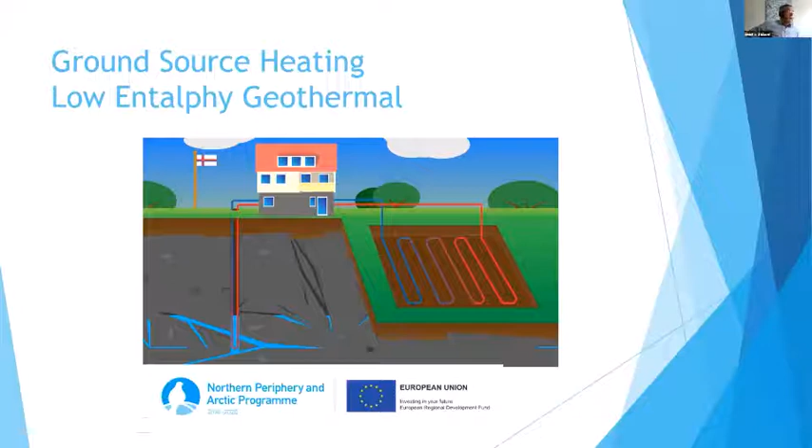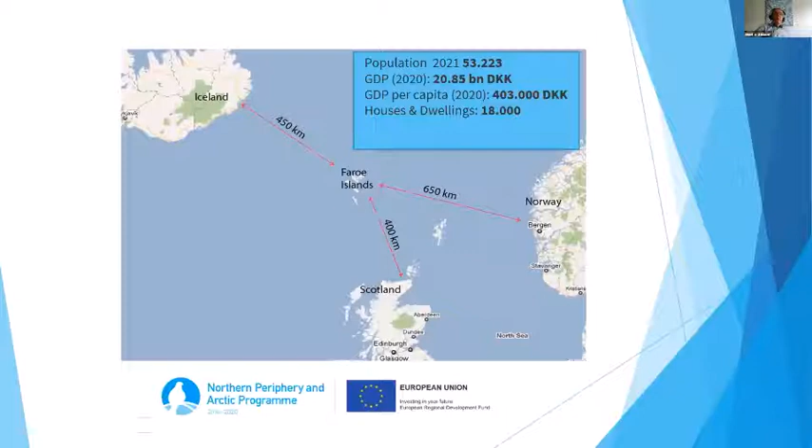And for those of you who don't know anything about the Faroe Islands, I have set up a small map. You can see we are lying here in the middle of the Atlantic Ocean between Iceland, Scotland, and Norway. And we are a total population of 53,000 people. Our GDP is relatively high. It's 20.8 billion Danish kroner, and that gives a GDP per capita of 400,000. And we have about 18,000 houses or dwellings in total in the Faroes.

The next figure is showing the energy flow of the islands. And as you can see, we are, as many other island communities, very, very dependent on oil. The first bars are the oil which is used by our fishing and merchant vessels, and it is nearly 40% of the total energy. And the more light red is oil which is used onshore, and we use it for transport, for industry, for heating, and for power production.

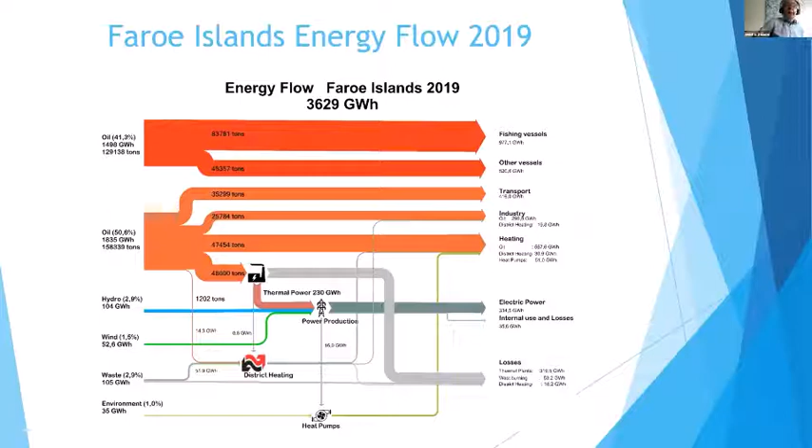And at the bottom you can see what we have of so-called renewable energy sources. That is hydropower, wind power, and waste burning. And they are very small compared to what we use of oil. That gives us a big problem because our CO2 emission is very high, and it is growing, and it has been growing all the years since 1990. So our challenge is how we can lower these CO2 emissions.

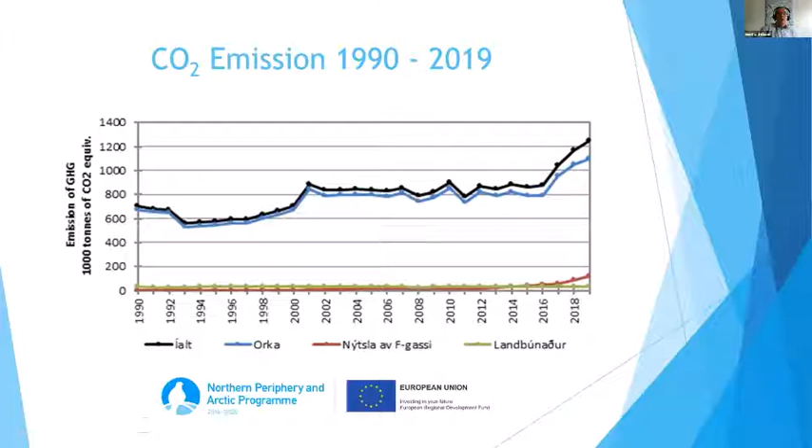And as I said earlier, we use a lot of oil for power production and for heating, and our aim is therefore to reduce the demand and shift over from fossil fuels to renewable fuels. And you can say we are to pick the lowest hanging fruit, and that is to look at if it's possible to replace the oil which is used for space heating in houses, and replace it with electricity in combination with heat pumps. And that's what my presentation will be about.

And we can say that 10 years ago we started an initiative where we would investigate if it was possible for rock heating to replace heating with oil burners.

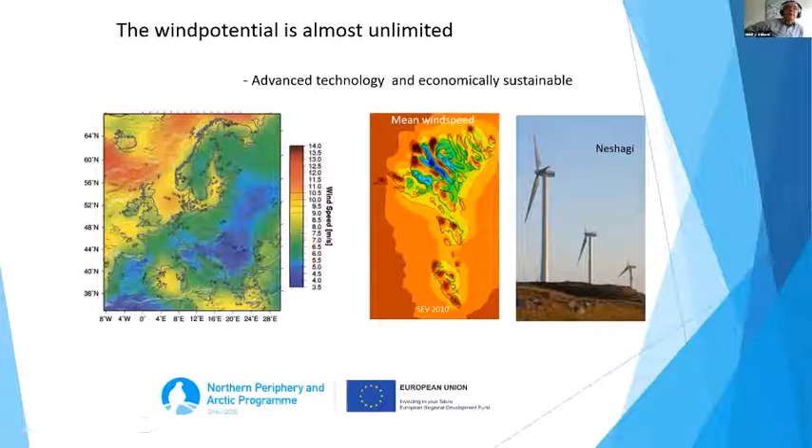On the next slide, you can see a map of the wind potential or the wind resources in Northern Europe. And you can see that we, on the Faroes, are in the red area. We have very, very good wind resources. The average wind speed is over 10 meters per second, and that is more than you have offshore in the North Sea, for example. And that's the reason why we think that wind power is a good alternative for us.

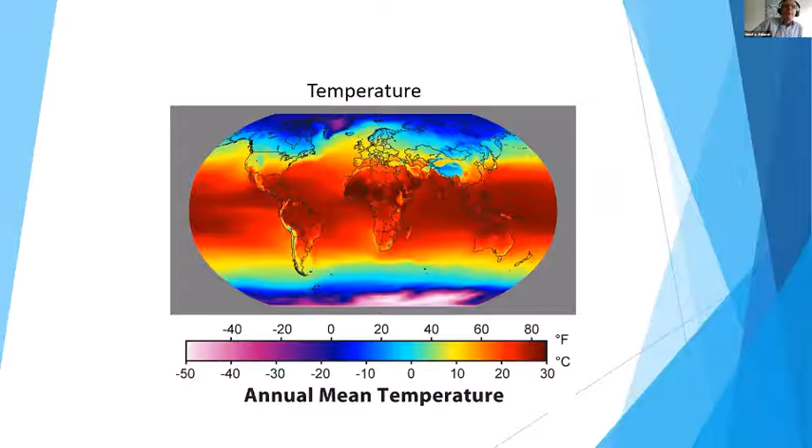Another important issue is that if you look at the globe and try to find out what is the mean temperature, you can see that the red area goes up in the north towards the area west of Scotland and south of Iceland, and that's because of the Gulf Stream. So you can see that we are living in an area where it's relatively warm compared to where we are placed on the northern hemisphere.

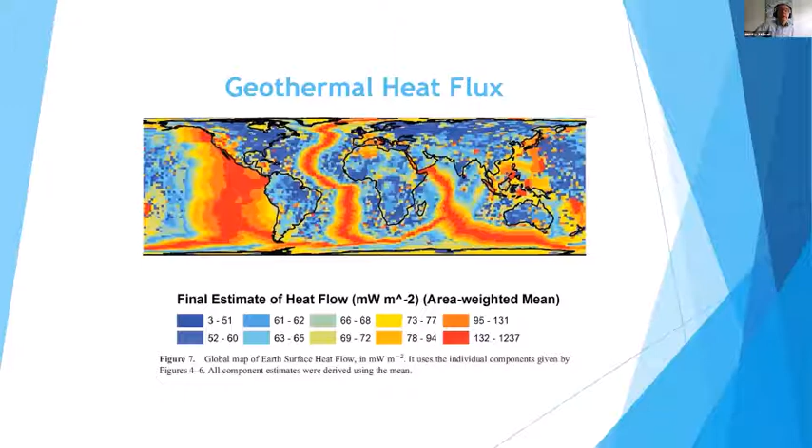And those things I have explained earlier mean that we have a ground temperature in the Faroe Islands of maybe from 8 to 12 degrees Celsius, and that is very high compared to what we have in other countries. For example, in Denmark, they have a temperature which is much lower than ours.

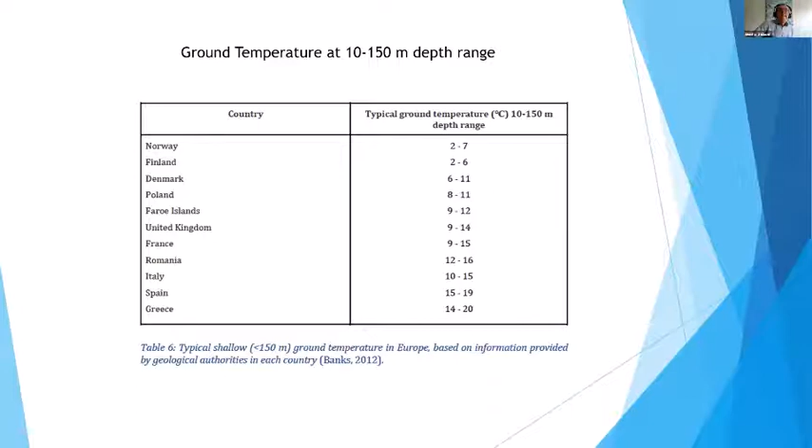So you can see that in all we have a very stable temperature. It's not very often that we come down to zero. On the other hand, we seldom come up over 10 degrees in the summer times.

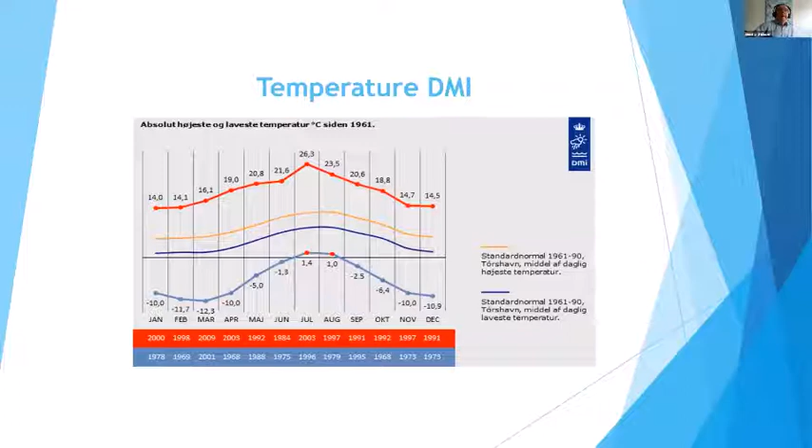This figure is measurements from a scientific drilling which was carried out on the island of Suðuroy, which is the southernmost island, and they managed to drill down to 3,000 meters and hit a temperature of 100 degrees Celsius. And I can also tell you that we have had oil exploration on the Faroe Islands from 2000 to 2014, where we drilled 8 wells, and we came down to a similar depth, 4,000 meters, and there we hit a temperature of about 100 degrees.

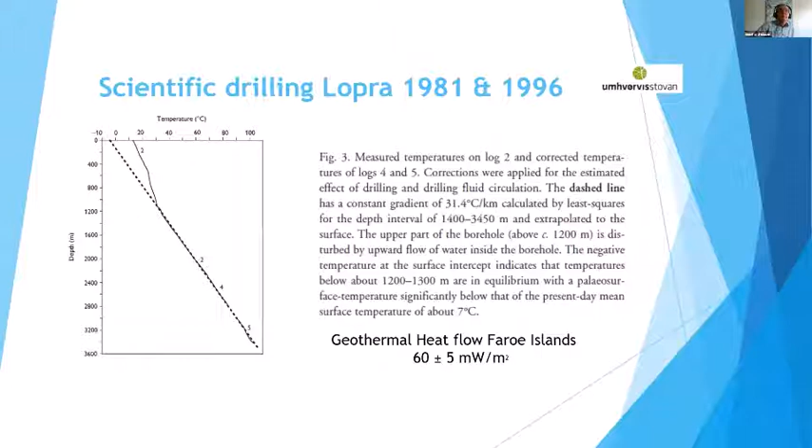And to come again to the point of what it is all about, we started a project 10 years ago where we tried to find out if geothermal heating could be applied on the Faroe Islands. In this case, we hired some expertise from Sweden, and they came up here with equipment, carried out a test drilling, performed a so-called thermal response test, and made some simulations of what it would be like to have a geothermal heat pump on our islands.

And the reason why we contacted people from Sweden is that Sweden, together with, for example, Switzerland, has been a pioneer in the development and commercialization of this type of heat pump. And they have done it for more than 30 or 40 years. And you can say that the geological conditions in Sweden are in some way similar to ours. The only difference is that they have granite in their underground, where we have basalt.

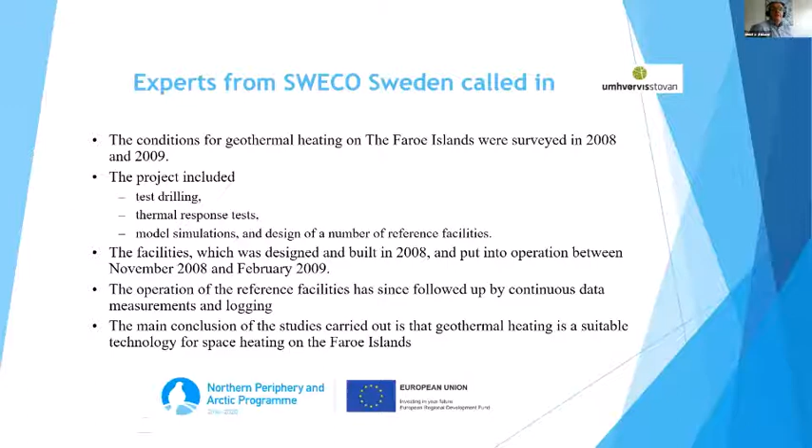And to go into more detail in the project, we wanted to find out, as I said earlier, if a ground source heat pump is a suitable technology. In this case, you must have in mind that, based on the temperature I told you about earlier, the houses and dwellings in the Faroe Islands need heating all year round. It's not the same as, for example, in Denmark, where you can shut off your heating systems in the summer months from May to August. And the question is, what effect will these conditions have on the borehole and on the temperature in the borehole?

Another important issue was to find out the geological characteristic for basalt. What temperature do we have, and what is the thermal conductivity in the basalt? And how should we dimension a heat pump? And it ended up with some recommendations, and there

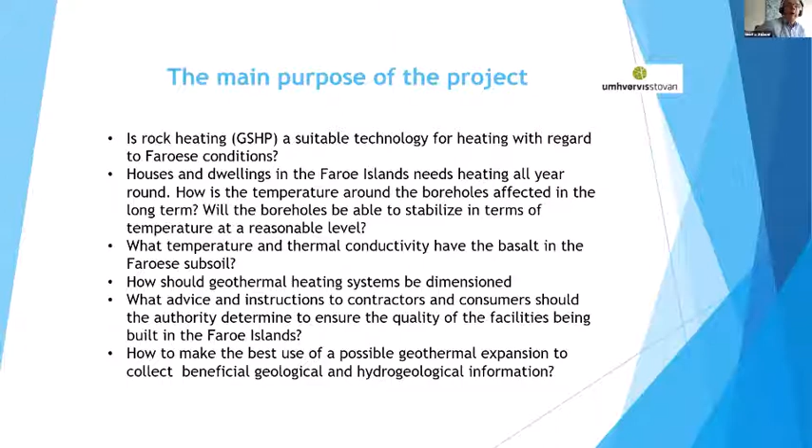you can see them. We found out that the thermal conductivity of basalt is about 1.8 watt per meter per degree Kelvin, which is slightly lower than, for example, granite, which we have in Sweden and in the southern part of Europe. But the basalt could be very different and not so uniform. So we have a lot of pores and rifts in the basalts, and that means that we have a lot of water in the pore space and the rifts.

And they also found out the other parameters. They measured the geothermal heat flux, which I mentioned earlier, and also the borehole resistance. And based on these conditions, they came up with recommendations that if you have a borehole on the Faroes, you can extract energy at 115 kilowatt hours per meter per year, and the maximum amount of energy is 25 watt per meter. And they also found out that drilling in basalt is very easy and uncomplicated. And until now, we have managed to drill boreholes down to 400 meters.

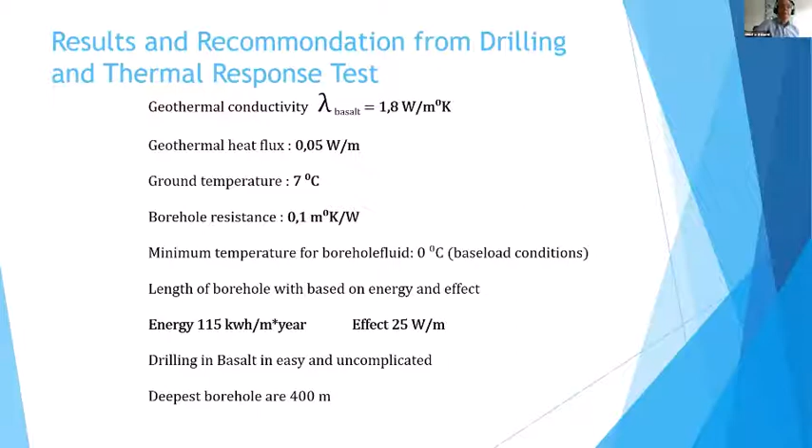And if we use those recommendations for a normal family house, which I show you on this calculation, let us say that we have a house of 150 square meters, and they use floor heating, and they have well insulated outside walls, roof and ground floor, and we have calculated that the amount of energy is 22,000 kilowatt hours per year, and the maximum effect is 5 kilowatt. That means on a cold winter day when many people take a shower, for example.

And if you have a heat pump with a seasonal performance factor of 3.5, then you can calculate that the length of the borehole is 137 meters if you look at the energy requirements, and if you take the effect requirements, it is 143 meters. And then to be on the safe side, we add 10 to 15% and ended up with our recommendation of 170 meters.

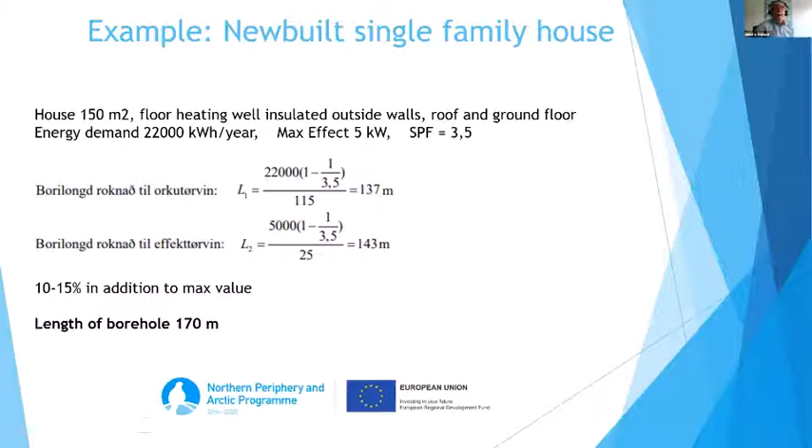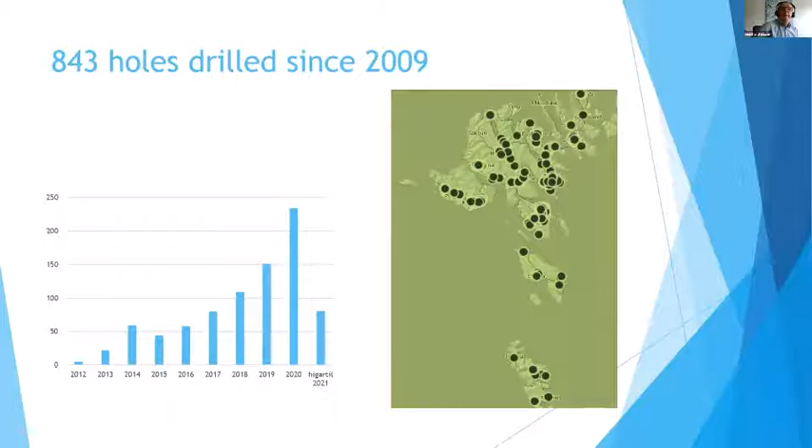Yes. And what have we obtained since we started this initiative? Until now, we have drilled 843 holes since 2009, and they are drilled all around the islands. You can see the black dots on the map. And today we have 2 drilling contractors, 2 drilling companies, and they are operating 3 drilling rigs, and they are active every day. And we have 5 companies who are selling, installing, and servicing ground source heat pumps. And in 2020, last year, they installed 220 new ground source heat pumps.

And the government has done other things also. If you invest in a heat pump, you can have the VAT refunded, and you also pay a lower price of power from the power company. And all holes are registered in a public database, which you can find if you go to www.kortal.fo.

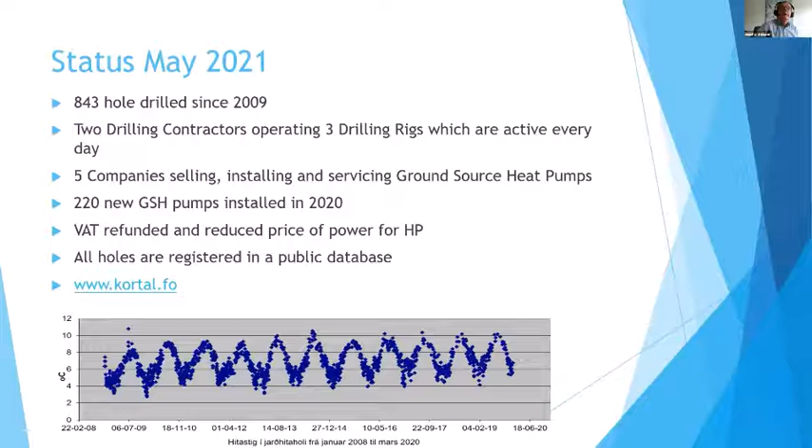And as I told you earlier, we set up a logging program, and the figure in the bottom of the slide shows the temperature in the hole from 2008 until 2020. And you can see that it is very stable. It's high in the summertime and low in the winter, and it is heated up again the next year. So you can see that the amount of energy which is extracted from the hole is not so high that the hole is cooled down.

On this slide, this is part of the capital of Tórshavn, and this is from the database which I mentioned earlier, and you can see all the holes that are drilled in this area. And to do that, you go into it on the web, and you can click on the so-called green energy, grøn orka.

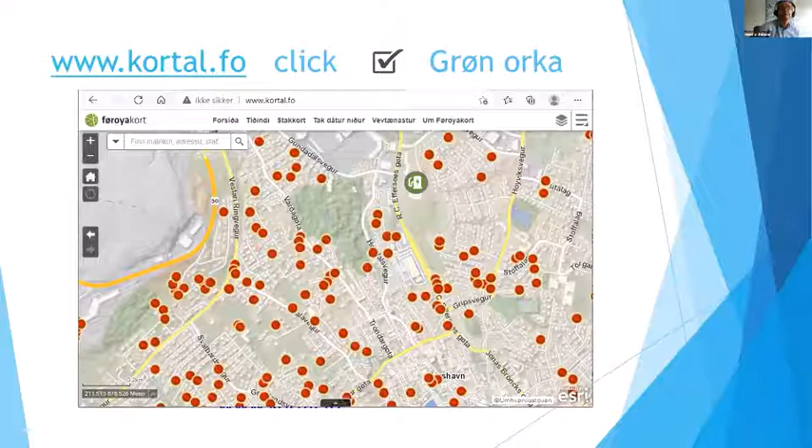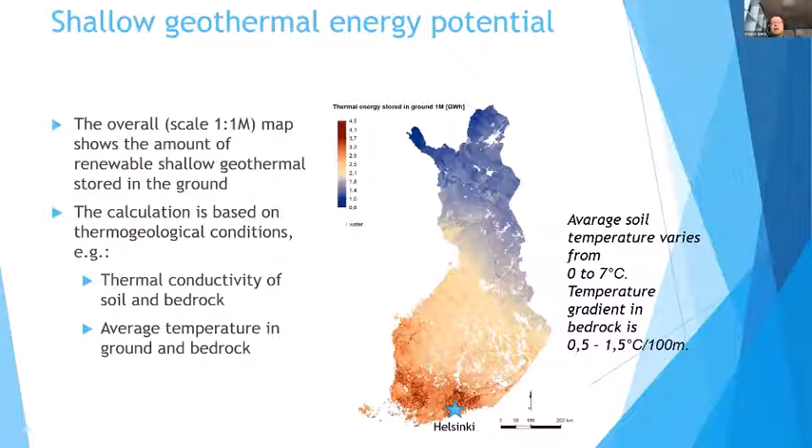And that's a challenge for these designers who try to design a proper shallow geothermal system. So we have made this overall map in this picture that shows the potential, but also pinpoints the most challenging areas in Finland. And our capital Helsinki is located in the south here, where the best conditions for shallow geothermal are also found. And about 30% of us Finns live around Helsinki, our capital. So the potential users for geothermal energy are also there. And I will use Helsinki as a case example in my presentation.

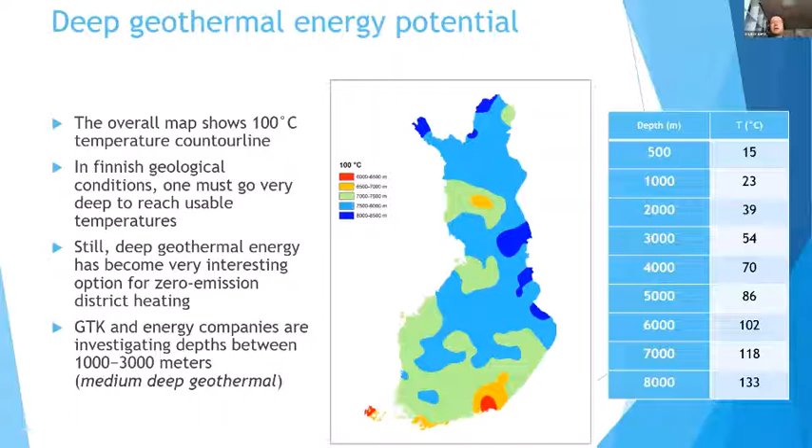And because we are a geological survey, we have also estimated the potential of the geothermal energy. The temperature levels are not so high compared to Iceland, for example, or the Faroe Islands, but we do like to drill deep. So these 1 to 3 kilometer deep boreholes, or medium deep boreholes, like we like to call them, have raised some interest. Especially energy companies are very interested to drill 1 to 3 kilometer deep boreholes nowadays, because you don't need a massive rig for that, and the drilling costs are smaller compared to actual deep drilling. But my colleague Annu will show you a case example later about this medium deep geothermal.

Of course, the Finnish government has some goals about carbon emissions, and we Finns have decided to be carbon neutral by 2035. And the Finnish government has also decided to quit using coal by 2029. And currently, more than half of Helsinki's district heating is produced by burning coal. But coal has already, of course, been replaced by biomass in many cases, but burning in general is not a sustainable solution for the future. And Helsinki also has been seeking alternatives for burning.

And geothermal energy could at least be one of them, one of the solutions. And so they have set a target in the future to raise the geothermal share up to 15%. That's a target, but at least they have set it.

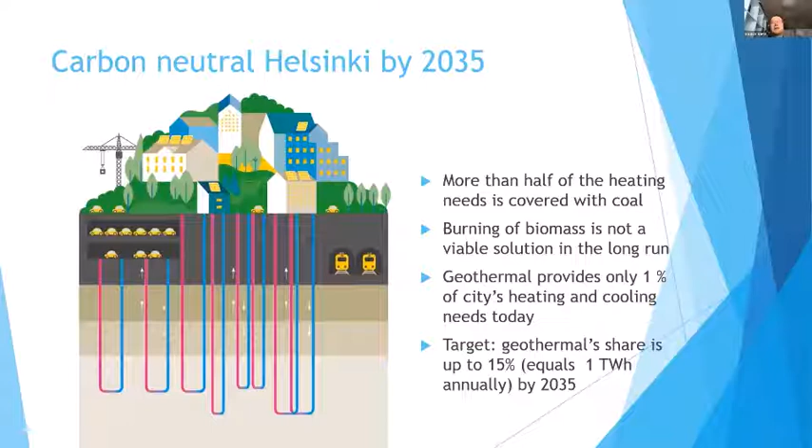So I already showed you the overall map of Finland, but we have also been estimating the geothermal potential for cities like Helsinki, you see here. In one large study, the whole city area was divided into 1 hectare squares with 25 boreholes inside them.

The heat demand of Helsinki is about 6.6 terawatt hours annually, and we have estimated that the shallow geothermal is so large that in theory, at least, it could cover the heating needs of the whole Helsinki for decades to come. But of course, that would require the whole land area of Helsinki to be drilled full of boreholes. And in this right side picture, you can see an example of a borehole matrix on the city map. The boreholes are 300 meters deep.

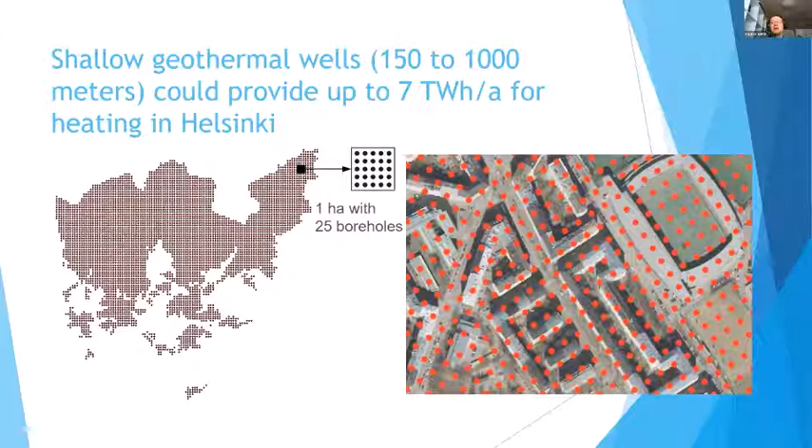And like we all know, in urban areas there are always limitations for drilling. There are underground spaces, tunnels, cables, piping, etc. But nowadays it is possible to drill even 1 kilometer deep boreholes using normal drilling equipment, and therefore partly avoid those limitations. So fewer but deeper boreholes can still provide enough energy for heating purposes.

And based on our report we did for Helsinki, the Helsinki City Planning Division made this online map, Energy and Climate Atlas for Helsinki. So in this atlas, you can compare heating energy needs for buildings and also see the energy estimations concerning shallow boreholes. And shallow means up to 1 kilometer deep boreholes.

And this atlas is one tool for decision making, whether you're renovating an energy system or planning a whole new building, for example. But of course, it's not a precise designing tool, but at least it gives you a rough estimate of shallow geothermal potential. So you can pick a plot and see what's the potential right there.

And like I mentioned, we like to drill deep. There's one ongoing deep geothermal project in Finland near Helsinki. ST1 is an energy company who mainly focus on oil products, but they have been finding new ways also. This project started back in 2014, and with these 2 deep wells extending up to 6.4 kilometers, it's the world's deepest industrial geothermal energy project right now.

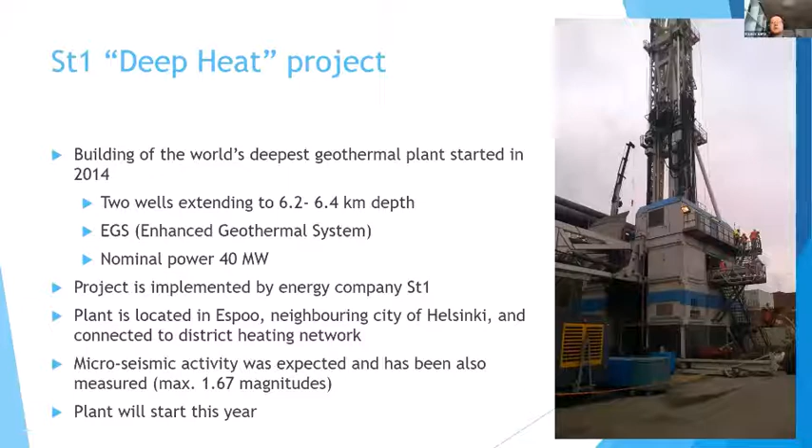And this project has a network of geophones around the drilling site, and they were monitoring seismic activity during drilling and also during the stimulation phase. Some microseismic activity was expected, of course, and also measured. This was 1.67 in magnitude, and it caused some noise and mild vibration on the ground. This deep heat project has had some delays, but hopefully it will start operating later this year.

My last slide is here. Even though this deep heat project is still under construction, our survey has been asked to do some deep geothermal exploration also in the Helsinki area. And we carried out studies near the city center last year with the district heating operator, Helen Limited. And we used the reflection seismology method for this study.

So now the most promising locations for utilizing deep geothermal energy have been mapped. And this energy company, Helen, will start test drilling on one site later this year. And this drilling project is also partly funded by our Ministry of Economics. And I personally hope that part of the upcoming EU recovery funding would be used also for other geothermal pilots in other Finnish cities, but let's see what happens.

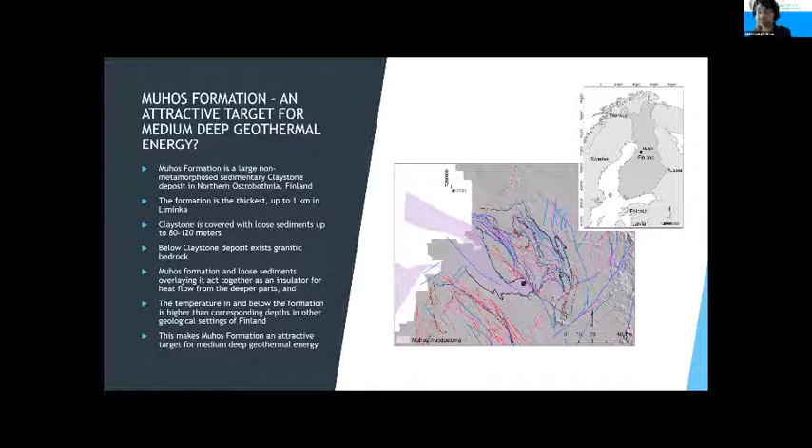As this claystone has low thermal conductivity, it produces the higher geothermal gradient, and therefore the temperature beneath the claystone formation at the interface of granite is higher than it would otherwise be in the corresponding depths. So in the Finnish scale, it is actually the temperature level that makes this Muhos formation an attractive target for medium deep geothermal energy.

The red line in the picture here, I have a different screen, shows the measured temperature as a function of depth from an almost 1 kilometer deep drill core, which is located in Liminka at the Muhos formation, and the drill core is completely covered with claystone. The average measured thermal conductivity is 1.86 watts per meter Kelvin, and the geothermal gradient is as much as 2.6 Celsius degrees per 100 meters, which is high in Finnish circumstances.

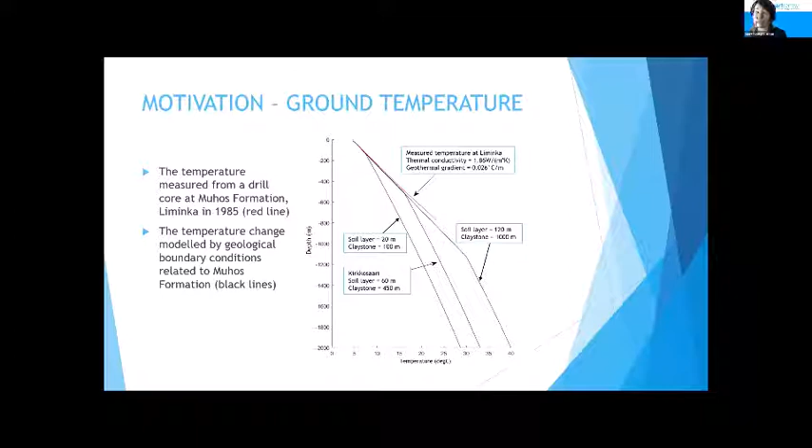And the black line in the middle represents the situation in Kirkkosaari, in which the municipality of Muhos is interested in utilizing geothermal energy, as there is no existing district heating network. The main focus of the project was to evaluate the thermal energy yield from a single 1 and 2 kilometer deep borehole, take into account the geological circumstances, and compare the results with conventional systems by estimating how many shallow 300 meter deep boreholes would be replaced by one medium deep borehole.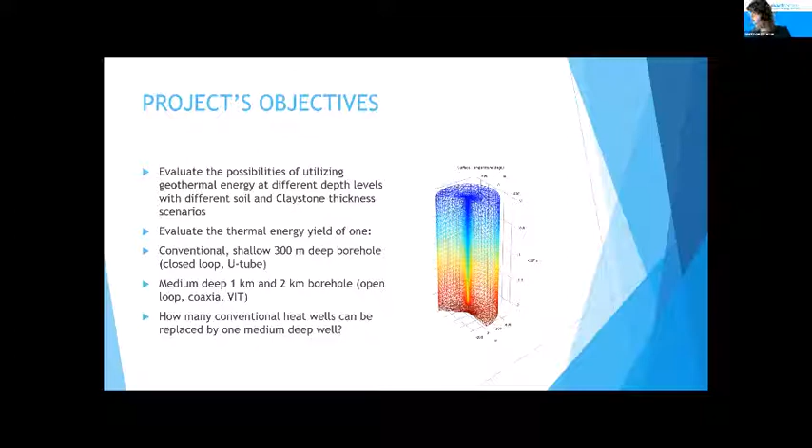And a few words about the numerical modeling. We used COMSOL Multiphysics to simulate the conductive heat transfer over 25 years into the future. The heat extraction was assumed to be constant throughout the 25 years, to get annually the maximal amount of energy from the ground using a coaxial BHE. And we assumed not to drop the borehole wall temperature below 0 Celsius degrees. And also we used the maximum volumetric flow rate with acceptable

pressure losses. And we modeled the open loop coaxial BHEs as a two-dimensional axisymmetric model. We used water as a working fluid. The water injection was assumed to be through the annulus here, and the heat extraction through this vacuum insulated pipe. And here are the physical properties we used in the modeling.

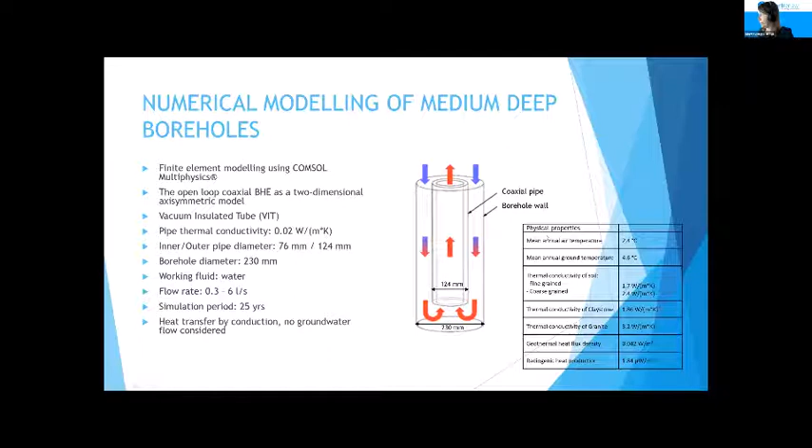So as result number 1, I want to point out the constant thermal power from a 2 kilometer deep borehole, which is represented in the picture on the right side. The thermal power is presented as a function of soil thickness. It varies from 20 meters up to 120 meters. And we used the highest possible volumetric flow rate of 6 liters per second. The results are presented for 2 scenarios where the soil layer is either sand or clay, which have different thermal conductivities, and which are combined with claystone thicknesses of 100 meters or 1 kilometer.

In the weakest scenario, the claystone thickness was 100 meters, and in the best scenario 1 kilometer. And with the flow rate of 6 liters per second, it is possible to achieve a constant thermal power of 120 kilowatts at maximum, which means in thermal energy annually about 1 gigawatt hour.

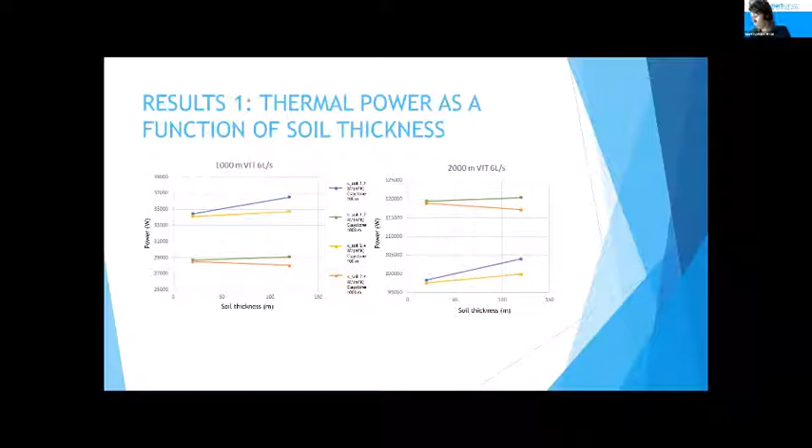And as result number 2, you can see here the inverse relationship of thermal power and the outlet temperature of working fluid as a function of flow rate. Here is the power, flow rate, and here is the outlet temperature. And please note these results are presented from the last simulation year, which is the 25th year. As you can see, at low flow rates, we can achieve a higher outlet temperature of working fluid, but lower thermal power. And as the volumetric flow rate increases, we can get more thermal power, but the outlet temperature drops.

So either the thermal energy production or the outlet temperature of working fluid can be maximized, or alternatively, they can be simultaneously optimized so that reasonable temperatures for heat pumps as well as heat production rates are expected.

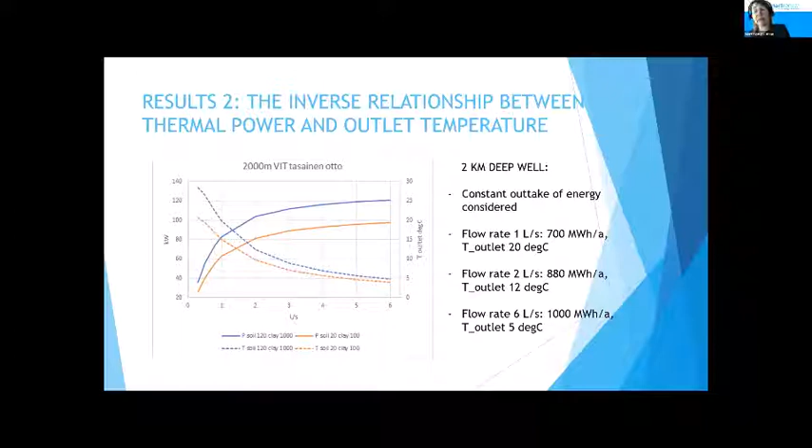As a short summary, from a single 2 kilometer deep borehole, it is possible to get annually approximately 1 gigawatt-hour of thermal energy when the maximum flow rate of 6 liters per second and constant heat uptake are considered. And from a single 1 kilometer deep borehole, it is possible to get 300 megawatt-hours annually, respectively. In the geological setting of Kirkkosaari, a single 1 kilometer deep borehole could replace 9 to 15 shallow 300 meter deep boreholes to cover the same amount of energy. And a single 2 kilometer deep borehole would replace 25 to 40 shallow boreholes.

So the conclusion is that on the Finnish scale, the advantage sought from medium deep boreholes may be to maximize the heat production with high flow rates and lower ground area requirements compared with conventional BHE fields, or with lower flow rates, a higher operating fluid temperature, which allows heat production coupled to a heat pump system with good efficiency and thus heat distribution at higher temperature levels.

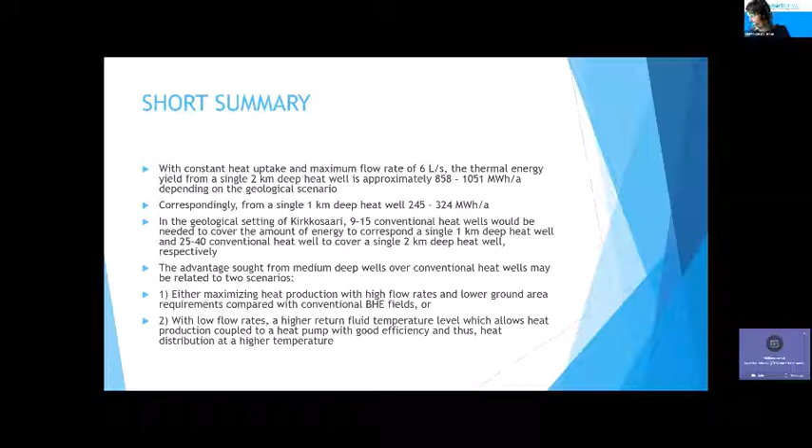Very, very interesting presentation. It certainly is important to know the geological structure underground to maximize performance.

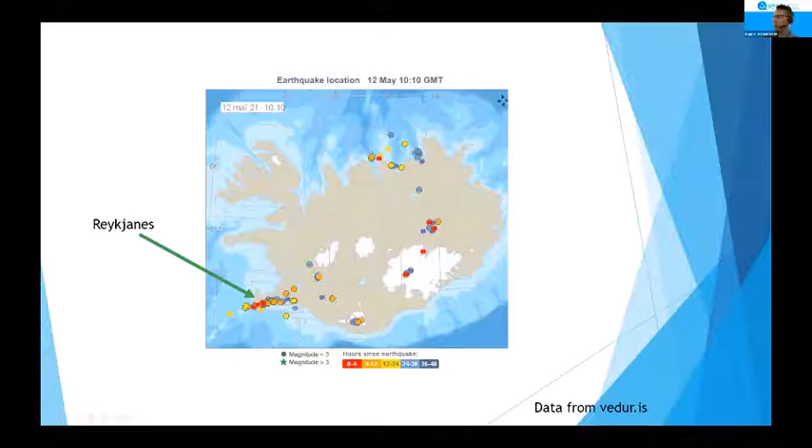Right now we have more activity of earthquakes near the eruption on the southwestern corner, but these are small earthquakes. You see on this graph here that there are no earthquakes beyond 3 in magnitude, so we barely notice them normally. And for this reason, we also then have high temperature geothermal areas, and that's the gray area in the center between the tectonic plates where Iceland is separating.

And we therefore have high temperature that we can produce directly from the steam generated from underground and produce electricity. But of course, we have a lot of waste heat from that process, and it's used in the main urban areas. Outside those areas, where you see the red and going into orange and then finally yellow, we have, let's say, medium temperature geothermal areas, which have been harnessed for the urban areas, mostly outside the high temperature zones.

But we still have regions on the outskirts of Iceland, on the far east, and then far northwest, and then of course on the small islands outside of Iceland, where we are not harnessing geothermal, and that's where we are trying to use more standard technology and smart technology. That's why we're in the SMARTrenew project.

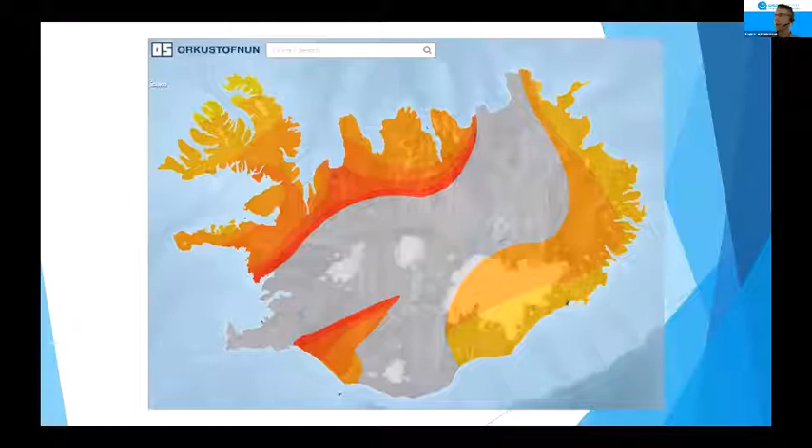You could probably argue that Iceland became renewable on land by accident. We were a very poor country from the 1300s to 1800s. That's where we had a really bad spell of weather for 500 years. So we had to use turf houses and other things available, burnt all the forests for heating. But nowadays that's all considered to be renewable activity anyway. And then we had to turn in more modern times to geothermal for heating of more cemented houses, let's say.

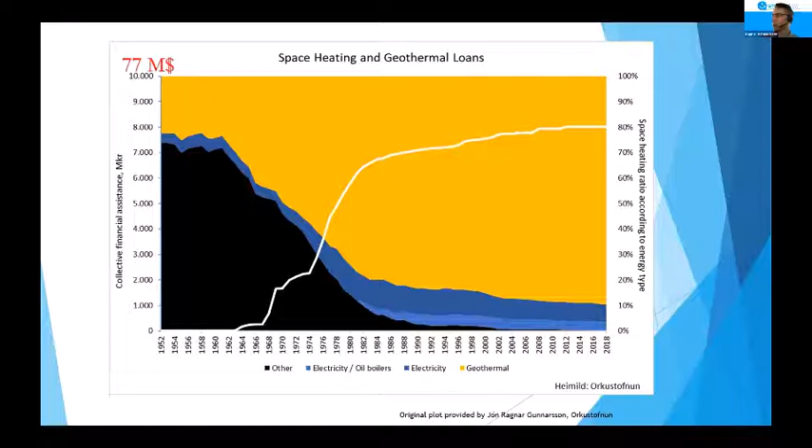Okay, so we are done with that. So with the transition on land for space heating, that's finished. So it's all renewable and from geothermal or electricity. But we are now facing another transition on the transport, both on land and ocean, and of course in the air. And that's a more complicated story technically ahead of us. And we are thinking how we can use geothermal in that story as well.

We probably need to drill much deeper into the volcanic regions to get even higher temperatures to allow processes where we can manufacture electrofuels using energy from, let's say, much hotter regions. And then we go into supercritical water. If you drill deeper, you go into the fourth phase of water, allowing you much more flexibility in production of future renewable fuels.

And the way to do that, let's say we use relatively known technology. This is a picture from roughly 2000, when these investigations started. We use standard wells down to 3,500 meters roughly, and then drill down to maybe 5,000 meters or so to get into the supercritical region. And we already have 2 or 3 wells drilled in this concept, depending on how you count them.

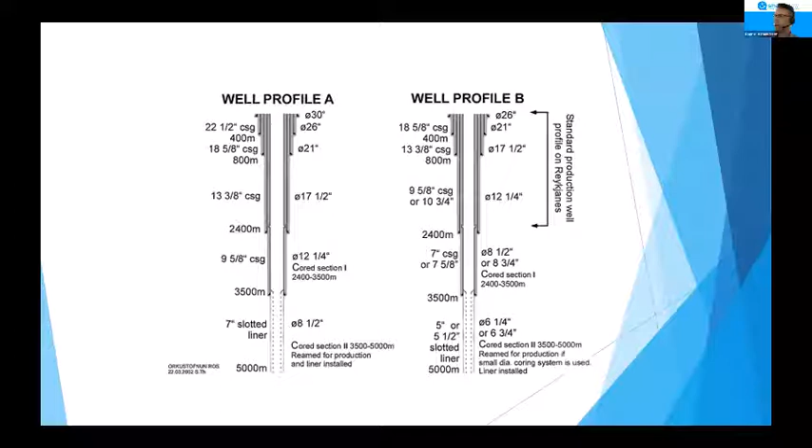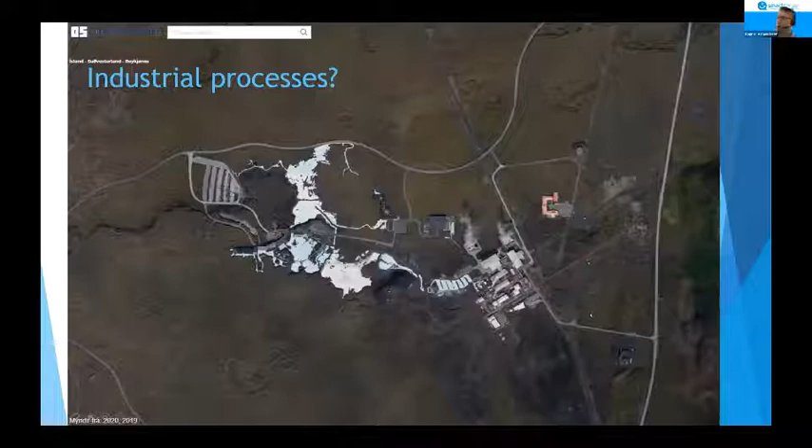So, okay, that's already started. I just want to, at the end of this short presentation, tell you about a European project which is ongoing, called Geothermica. It's running right now, and it's a platform to share knowledge and know-how in geothermal across at least the European region. And there are many nations, like Ireland, for example, in there. And right now there's a call being opened on accelerating the heating and cooling transition, they call it.

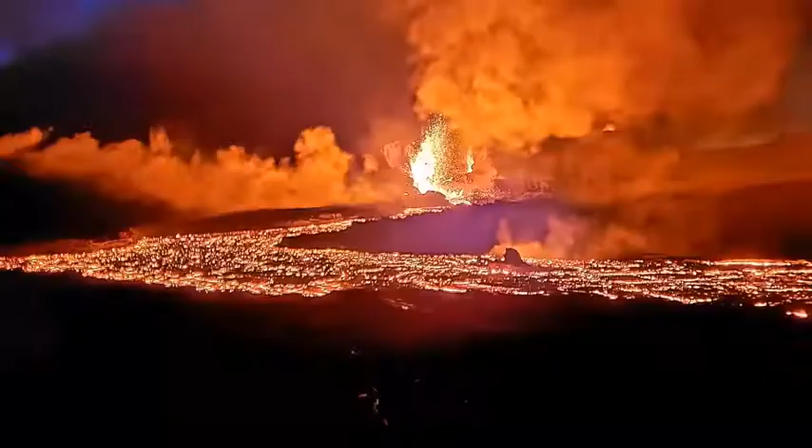Okay. Do you see it? Yeah, you just want to hit your, yeah, that's fine there, yeah. Okay, everything is okay. You can hear me and everything.

Yes, I'm going to talk to you a little bit about how we in Iceland have been using geothermal energy, and take our area where our office and our workplace is, me and Ragnar, the northeast part of Iceland, as an example. Of course, like Ragnar said, we use geothermal energy almost everywhere in the country. But in some areas that we call cold areas, the far east part and the far west part, we use electricity as the main heating.

Yeah, as you know, compared to Finland, which I learned just recently is the oldest part of Europe, I guess we can claim that we are the youngest part of Europe. Iceland is renewing itself every now and then. That's nice, makes good scenery, and you can visit every other year and you get a new country to visit.

But the main blessing of this very active geothermal energy we have in Iceland is, of course, how we utilize it. And I will give you an example of that from our part in the Northeast. As you know, from the consumer side, we need to fulfill 3 sectors when we produce and use energy. And sadly, this was the case for Iceland, as you saw in the graph that Ragnar showed you. And this is still the main thing in the world, where we use fossil fuel to meet the demand from all these sectors, where we take unsustainable carbon from the ground and burn it for electricity, for heating, and for transport, and throw it up in the air where it's getting problematic.

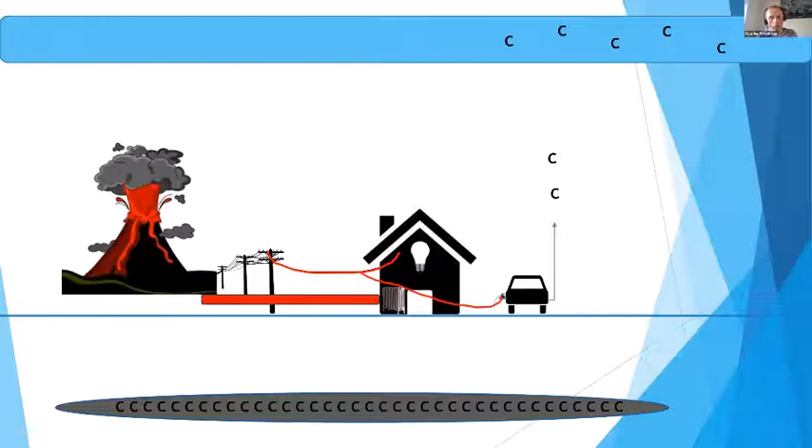Here in Iceland, we decided to do it differently and are trying to change this picture totally. We have started, of course. We simply plug into a volcano and produce electricity and, of course, heat. So that's fixed, and we can also now, with the technique that is ongoing, drive our cars on geothermal energy. So this is the future we are heading to, quite fast, but maybe not fast enough. But this is the final scene we want to see, where we cut the links between the carbon in the ground and the carbon in the atmosphere, and keep it where it is.

This is the area I was talking about, the northeast part of Iceland. And bear in mind that we are only talking about 30,000 people living in this area, with the main town Akureyri, where our office is, with 20,000 people. And they are distributed around the area in many small towns. This is not as great a geothermal area as the capital area. So actually, the history of geothermal utilization in these areas has been a little bit more difficult, but still successful.

And that is maybe one of the stories we want to tell outside our country, that even though we are blessed with this nice, cheap, green energy source, it was extremely difficult to harness it in the beginning, both expensive and technically difficult at that time. So it's not like there are just volcanoes in every town. We need to find the spots where the heat has gone from the main volcanic areas in the highlands through cracks after earthquakes. And then maybe the main problem is to find the best spots where we have heat and we have water. These two elements have to go together to find the good spots to harness.

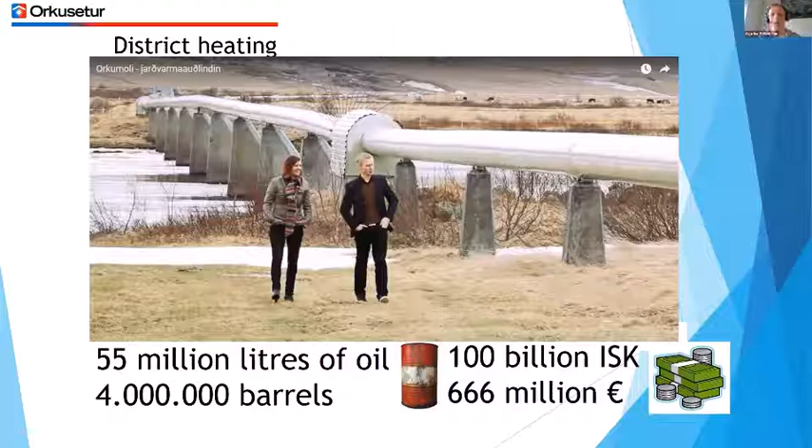And as you can see, the savings in house heating are humongous. And these are numbers that you have to compare with the population of 30,000 people in the area. And the savings are so much that you don't have to have a PhD degree in economics to see that without this, everything would be totally different in Iceland, because most of our income would go into just keeping us warm. Or on the other hand, we would never have built up this society as we did without this resource.

So this looks like easy money and a gold digging venture, but the thing is that when you look back, and that's maybe the lesson we have to look at and learn, when you try to fit this business model of drilling and putting up district heating in this area, it just doesn't fit in a normal business Excel sheet. But still, we are here, and nobody wants to go back.

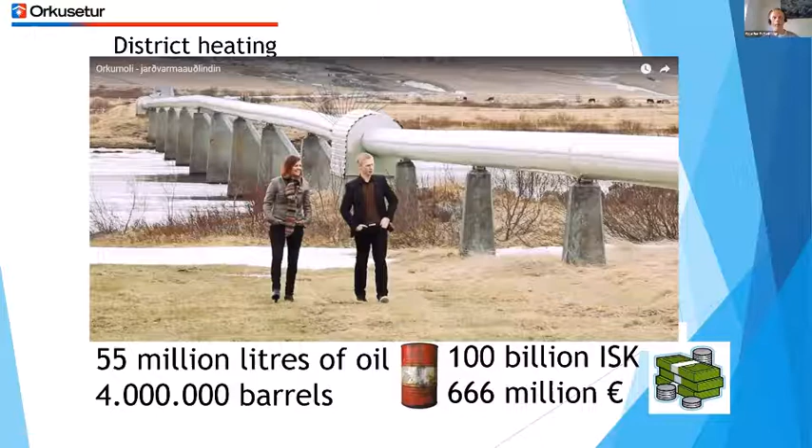So there is a kind of gap between normal investment thinking, business models, and reality, because this has been a lottery for us. And maybe it was a good thing that people didn't have Excel at that time, because I guess the investors would say no with the outcome of the Excel sheet, but somehow we are here, and nobody wants to go back. And we are in a good place, like Ragnar said.

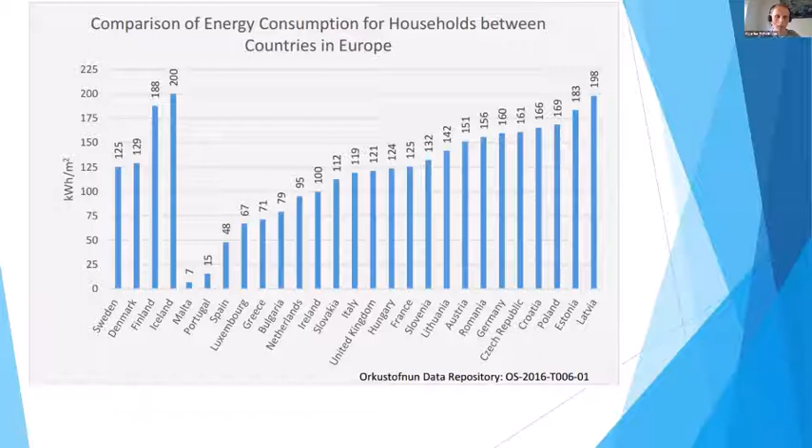You can see here the average district heating price in Europe. We are of course on the bottom, and that's very good, especially because here you can see how much we need. We need the most. We are even far more north than the Faroe Islands, so if they have to heat the house the whole year, we have to do almost more. But then with these two slides, you can see how lucky we are that we can take the district heating price down to that without subsidies.

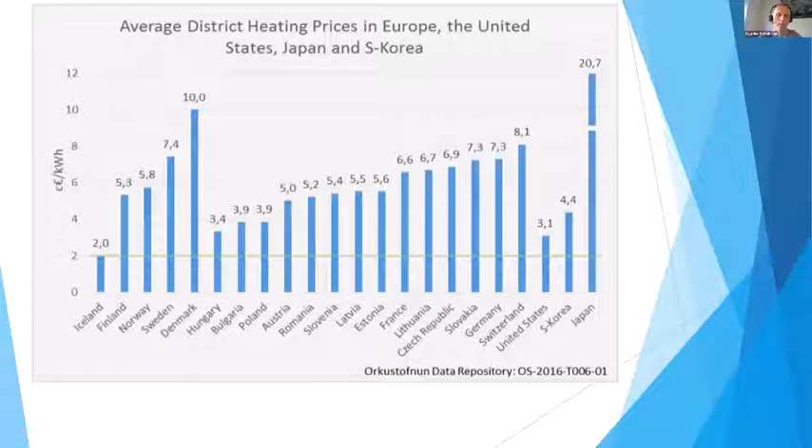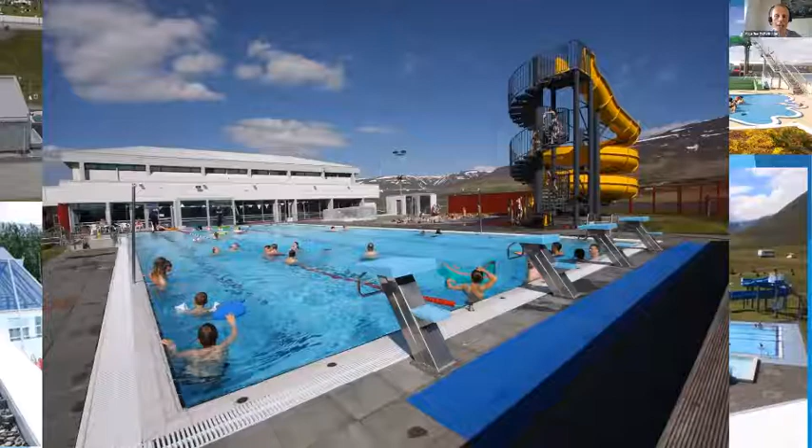As you know, we have a little bit extra now, and we can use it a little bit wildly. These are all outdoor pools in many of the small towns. Remember, we're only 30,000 people. This is my pool. Bear in mind, there are only 200 people living in that village, and we have it open all year round. So we're a little bit spoiled with the energy source, I know that, but still, I hope you remember the courage we had in starting this. That was a real thing, even though we are cashing in now quite heavily.

A little bit more, because we are also lucky in the area that we also have steam power. I was talking about what we call low heat. That's the heat we use directly for district heating. But in some areas, we have high temperature vapor possibilities to produce electricity with the geothermal heat. And we are lucky in the area that we have such potential, and we already have three power plants that produce electricity.